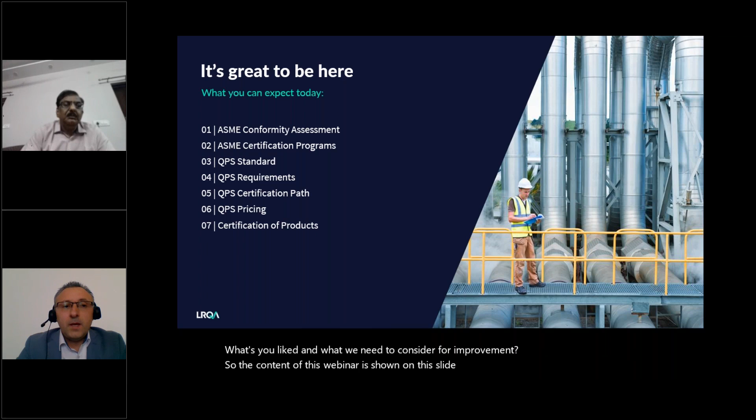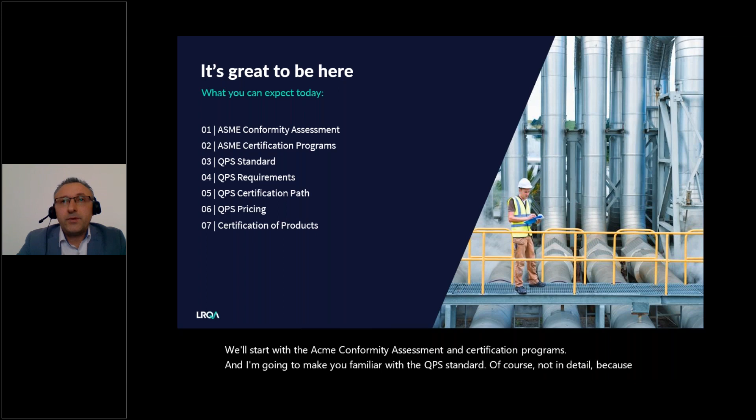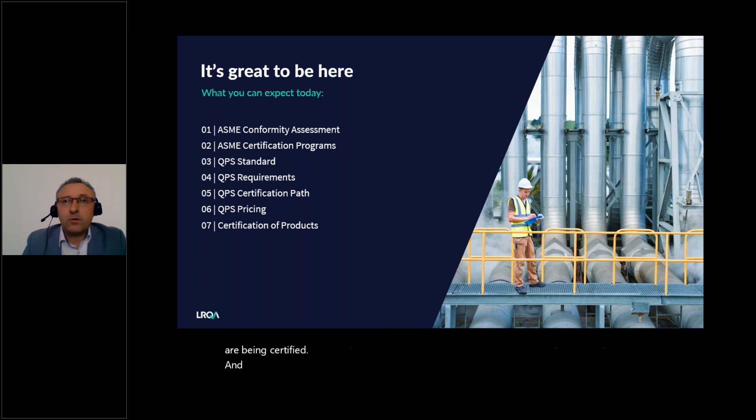The content of this webinar is shown on this slide. We'll start with the ASME conformity assessment and certification programs, and I'm going to make you familiar with the QPS standard, of course not in detail because this is just an introductory training session. I'm going to show you a couple of very specific QPS requirements and how the certification path looks like, information about the pricing, how the products are being certified, and of course, if you have some specific questions, we are going to take care of them.

ASME is located in the United States of America. The headquarters are in New York, but ASME has various offices throughout the United States in Little Falls, New Jersey, in Washington, D.C., Houston, Texas, and also Connecticut. Outside the United States of America, ASME has a liaison in Europe, Mr. Giancarlo Gobbi from Italy, and there are two more offices in Asia, in Beijing, China, and New Delhi, India. China and India are very important markets for ASME, and it's really a pleasure and privilege for me to make this webinar for India.

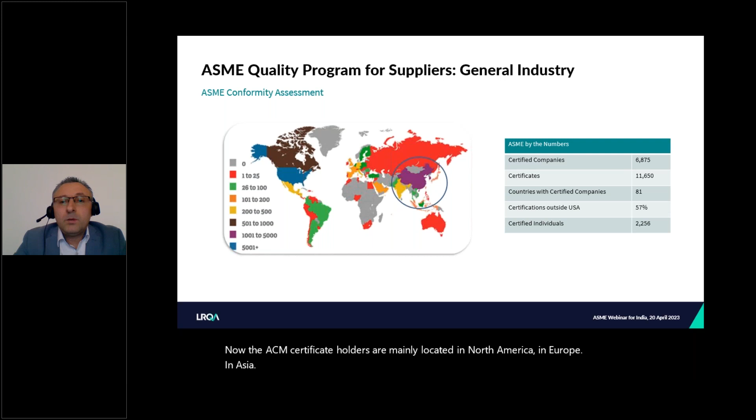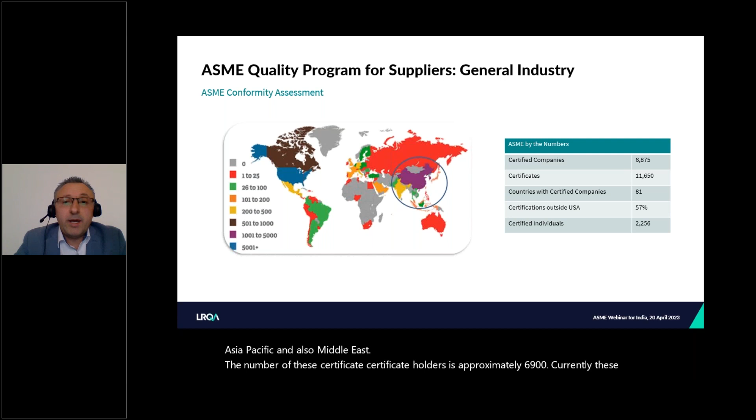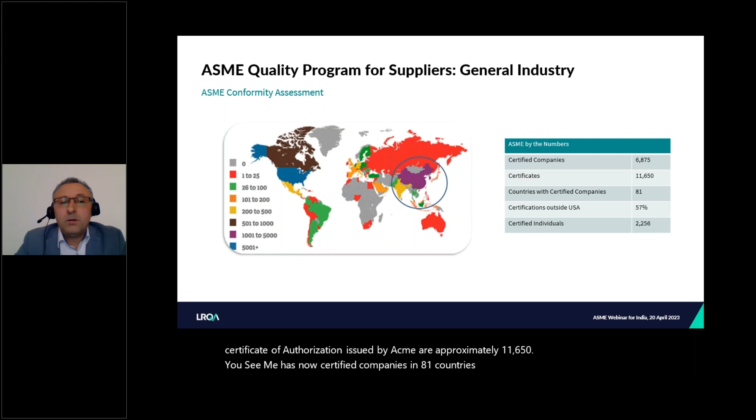Now, the ASME certificate holders are mainly located in North America, in Europe, in Asia, Asia Pacific, and also the Middle East. The number of certificate holders is approximately 6,900 currently. The certificates of authorization issued by ASME are approximately 11,650. ASME has now certified companies in 81 countries. 57% of the certificates issued are now outside the US, and more than 2,000 individuals are certified as certified individuals.

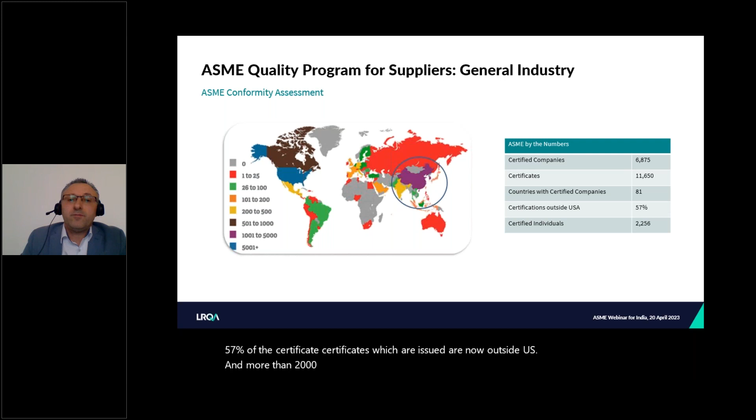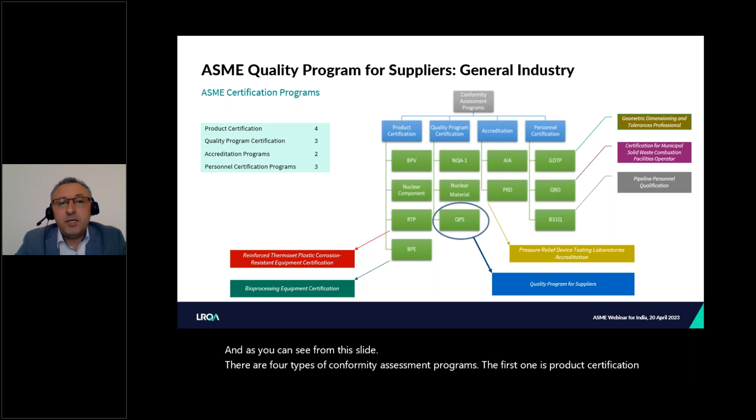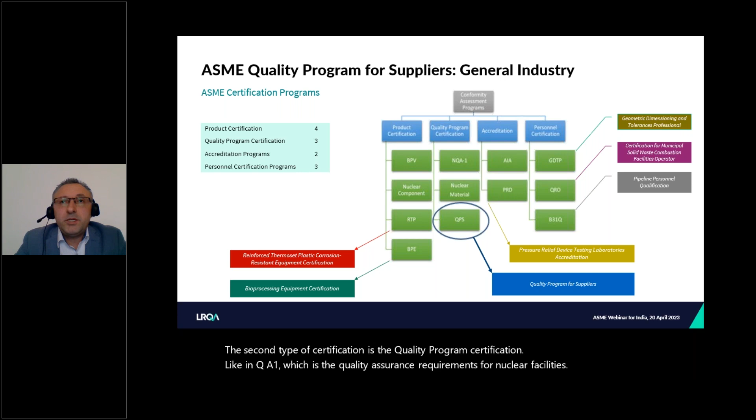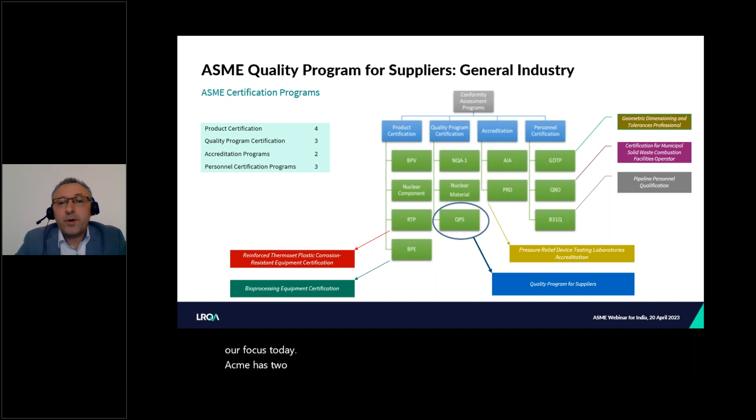ASME has developed and maintains various quality programs and conformity assessment programs. As you can see from this slide, there are 4 types of conformity assessment programs. The first is product certification, like boiler and pressure vessels (BPV), nuclear components, reinforced thermoset plastic corrosion resistant equipment, and bioprocessing equipment. The second type is quality program certification, like NQA-1, which is the quality assurance requirements for nuclear facilities, nuclear materials for companies producing and supplying materials, and QPS, the quality program for suppliers, which is our focus today. ASME also has 2 accreditation programs for authorized inspection agencies and for pressure relief device testing labs, and 3 personnel certification programs.

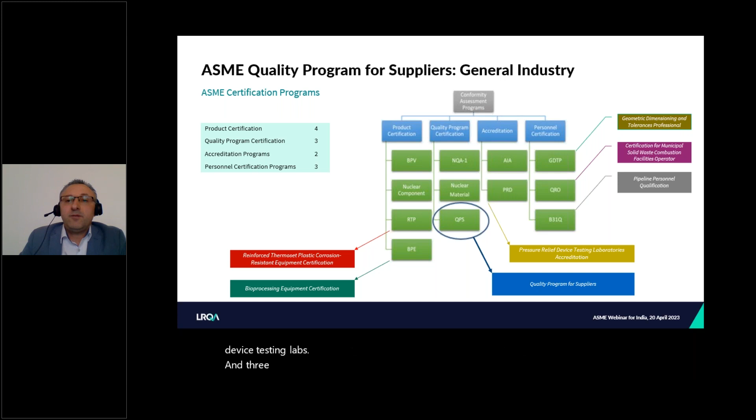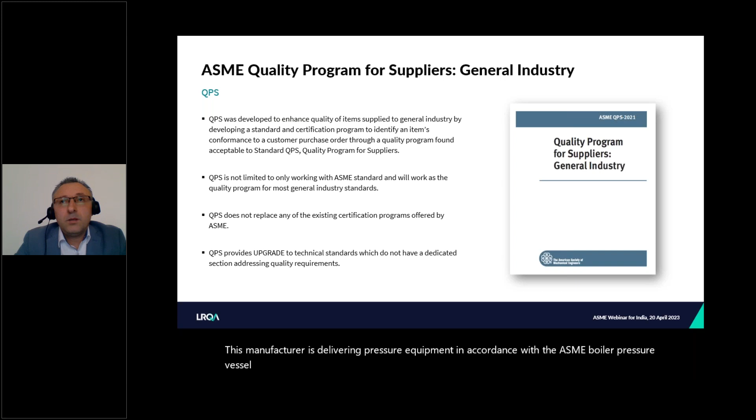What is QPS and why should QPS be applied? Let's take a manufacturer of pressure equipment in accordance with Section 1 or Section 8, Division 1. This manufacturer is delivering pressure equipment in accordance with the ASME boiler and pressure vessel code. So this manufacturer is a certificate holder, and this manufacturer is issued a certificate of authorization by ASME, which enables them to apply the ASME certification mark.

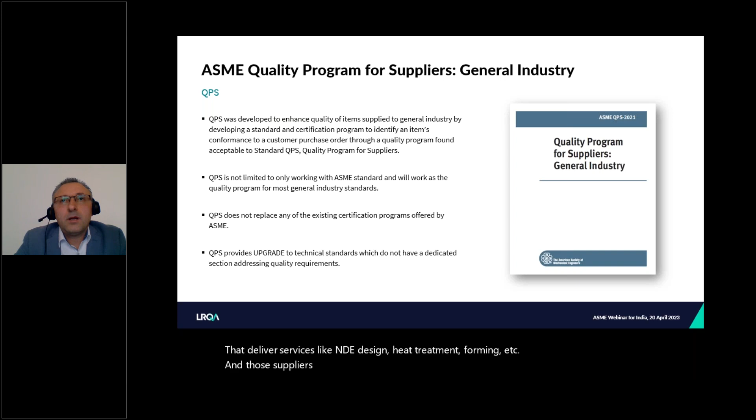But normally this manufacturer has various subcontractors, and some of those subcontractors are, for example, material manufacturers, non-nuclear, or companies that deliver services like NDE, design, heat treatment, forming, etc. Those suppliers are outside of the BPV and nuclear certification program of ASME, so there are no certification scopes for them. For that purpose, the QPS program was developed and will be implemented by ASME to allow all these companies, all these suppliers, to get a certificate of authorization from ASME.

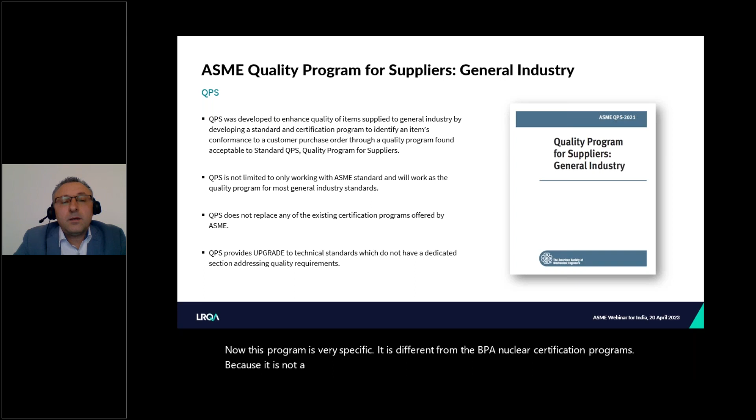Now, this program is very specific. It is different from the BPV and nuclear certification programs because it is not a product certification program, it is a program certification, which means that the organization does not certify the product itself, but they have and maintain a quality program, and they follow this quality program in order to deliver their product or services to their clients.

So the QPS is a program that can be applied and implemented by many types of organizations, and this is exactly the purpose, for those organizations who are outside of the certification scope of ASME to be able to get certified. This is an upgrade to technical standards which do not have a dedicated section addressing quality requirements, because such standards are just standards for manufacturing of products, but have no provision to provide quality programs.

So QPS can be used as an addition and in conjunction with such standards. This is important, it's not a replacement of an existing ASME program, it is a separate program. It is anticipated for companies which are delivering something, following their program, and verifying that by following their program, they will deliver products or services which are in compliance with their customers' requirements. And these customers' requirements can come from a standard, from a specification, or from another source document.

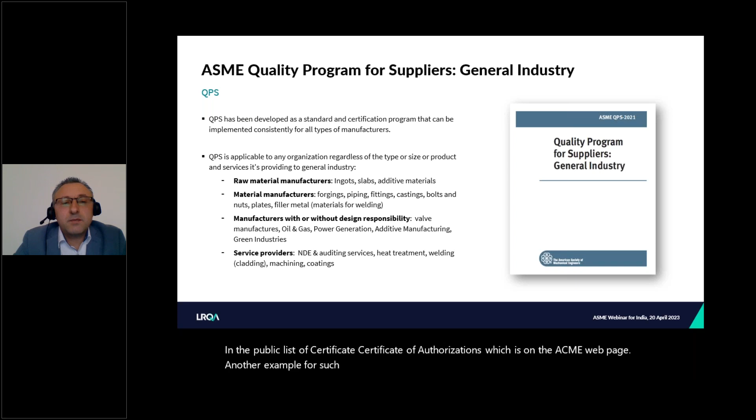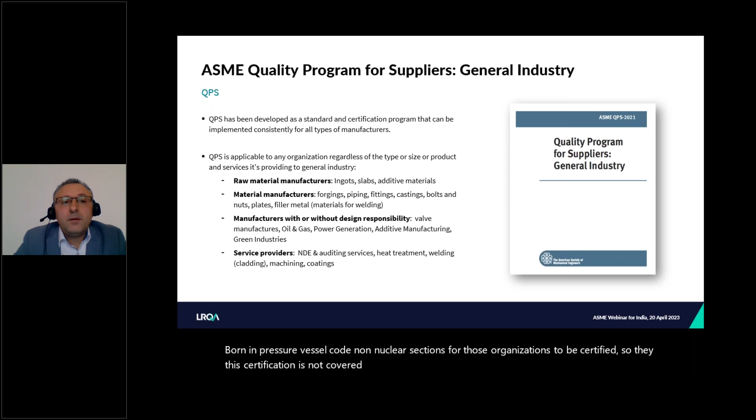Another example of such an organization is material manufacturers, non-nuclear, because there is no requirement in the Boiler and Pressure Vessel Code non-nuclear sections for those organizations to be certified. So this certification is not covered by the BPV, and so a material manufacturer can use the QPS standard to get a certificate of authorization from ASME.

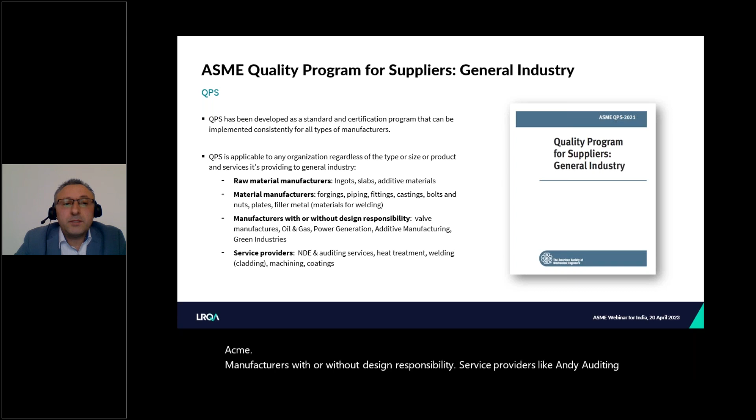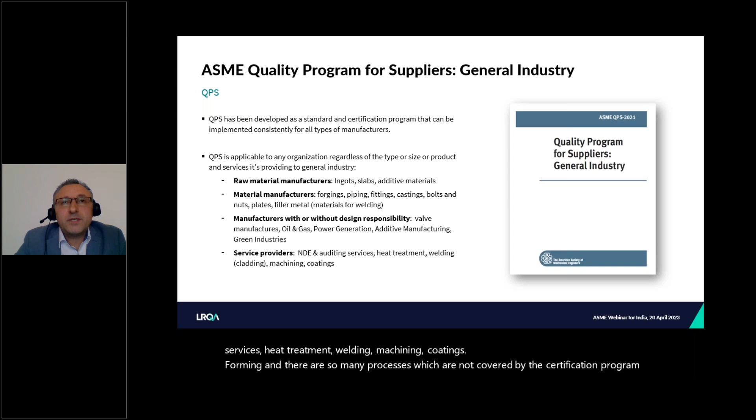Manufacturers with or without design responsibility, service providers like NDE, auditing services, heat treatment, welding, machining, coatings, forming - there are so many processes which are not covered by the certification program of the ASME Boiler and Pressure Vessel Code or nuclear code, but now they can get the certificate.

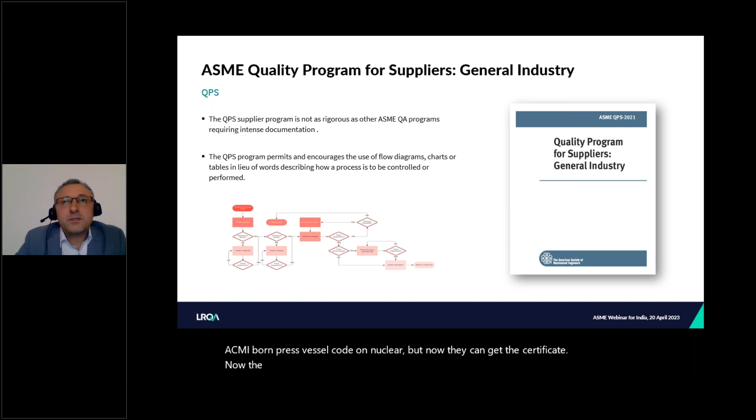Now, the quality program that needs to be established by the manufacturer is according to the QPS standard. There are requirements, of course, for the quality program, quality manual, but these requirements are a bit different from what you know and what you are familiar with in the Boiler and Pressure Vessel Code, for example.

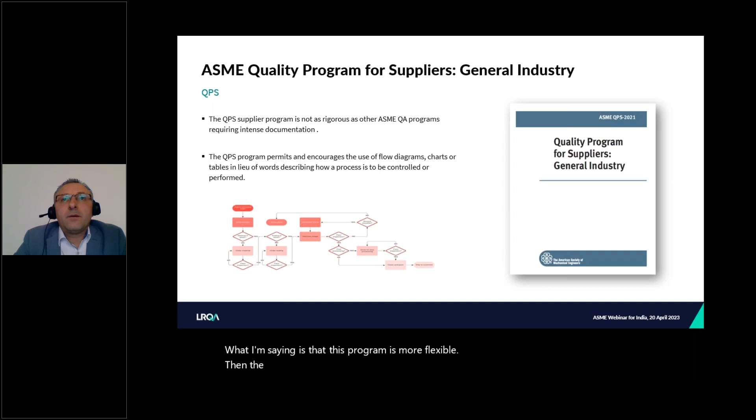Certain requirements can be, let's say, replaced by diagrams, charts, tables, spreadsheets, whatsoever, and not necessarily expressed by wording, so that the program is much more understandable and can be easily implemented by the organization and easily understood by the customer. So what I'm saying is that this program is more flexible than the requirements from the BPV for a quality program.

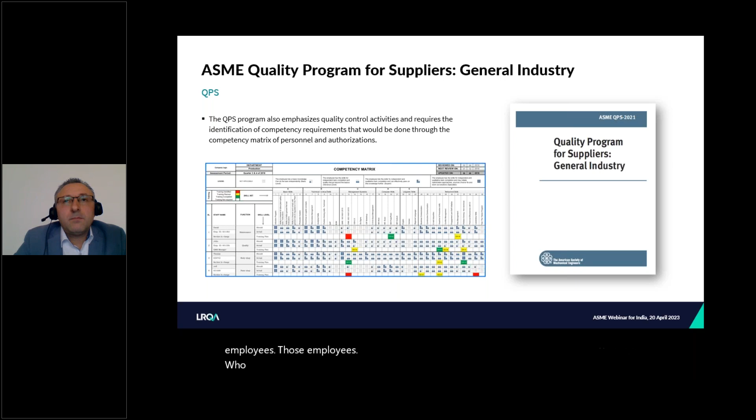A very important requirement in the QPS standard is the competency matrix. This matrix shows how the manufacturer is prescribing the competency requirements for the key employees, those employees who need to be qualified, who need to be competent, who need to be somehow credentialed.

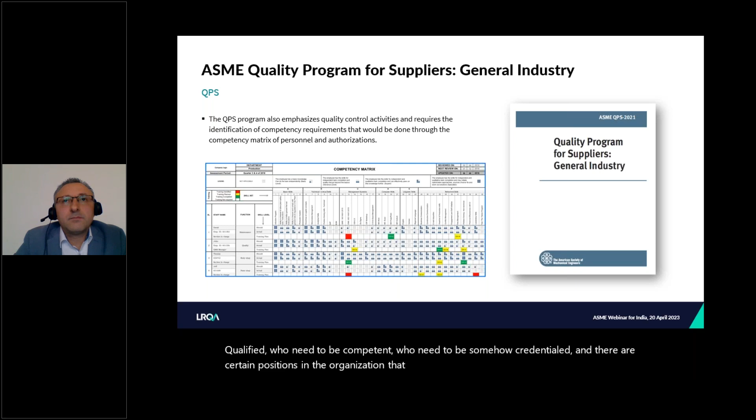And there are certain positions in the organization that need credentials, like quality manager, technical manager, NDE staff, welders, those who are performing internal or external audits. All these people must be competent, and this competency must be specified by the organization, normally in a document called the competency matrix.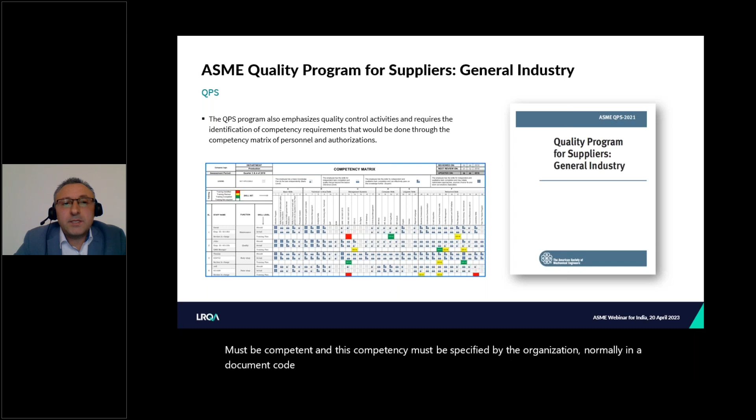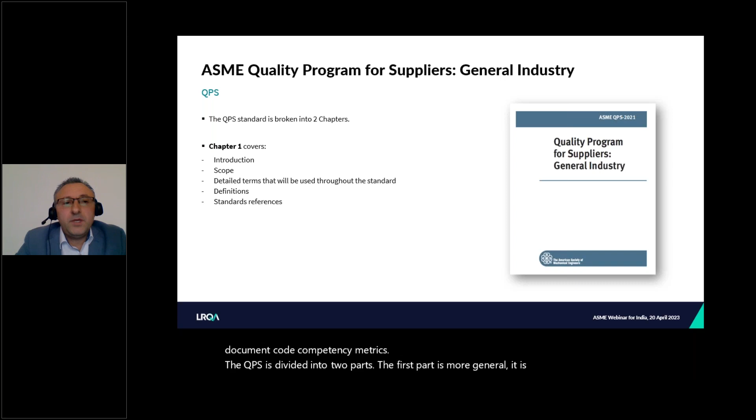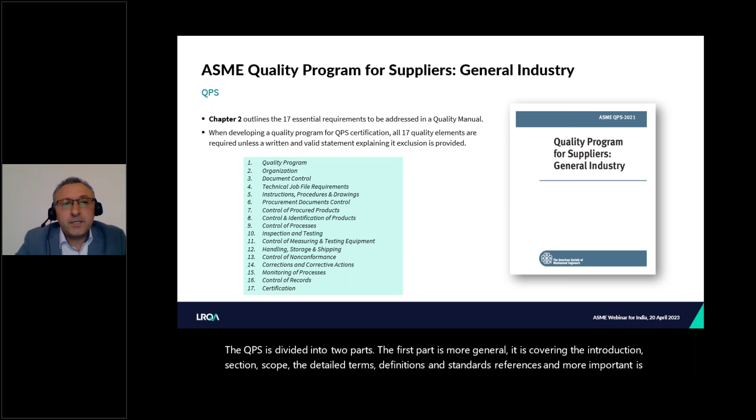The QPS is divided into two parts. The first part is more general, covering the introduction section, the scope, the detailed terms, definitions, and standards references. More important is the second chapter, which outlines the 17 essential elements or requirements to be addressed in the quality manual.

Now, if one of the elements is not necessarily applicable for an organization, it can be excluded, but there must be an explanation why it is excluded. And you can see these 17 elements on this slide.

Quality program is a typical section in every quality manual, saying some responsibilities and organization, like the second chapter. Document control is also a typical section in each program. Technical job file requirements - this is very important and specific for QPS because...

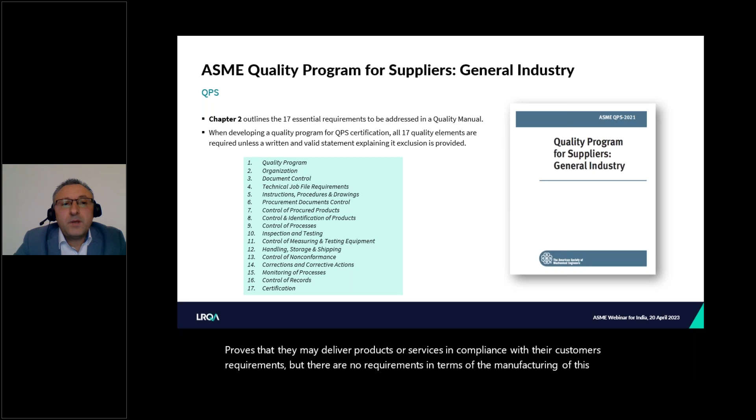QPS is a quality program, and by following this quality program, the organization proves that they may deliver products or services in compliance with their customers' requirements, but there are no requirements in terms of the manufacturing of these products. That's why the QPS is always used in conjunction with a construction code or governing standard.

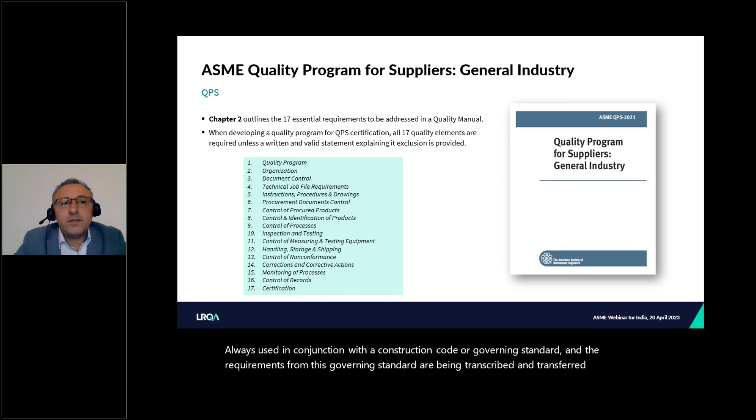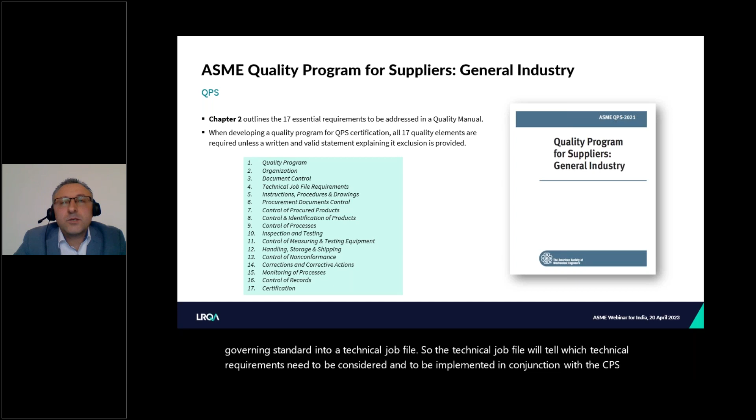And the requirements from this governing standard are transcribed and transferred from the governing standard into a technical job file. So the technical job file will tell which technical requirements need to be considered and implemented in conjunction with the QPS requirements, so that in the end, the organization can declare, can certify that the requirements of the QPS are fulfilled, and also the requirements in the technical job file.

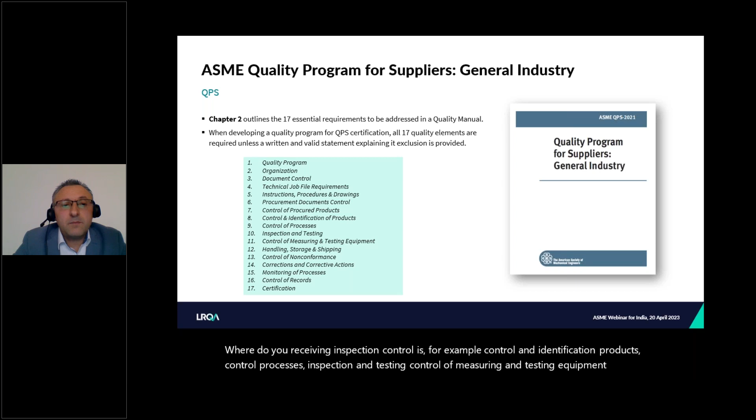Another element is instructions, procedures, and drawings. We also have procurement document control, where the selection of suppliers is covered, and also the preparation of purchase orders. Another element is control of procured products, where receiving inspection control covers, for example, control and identification of products, control of processes, inspection and testing, control of measuring and testing equipment, handling, storage, and shipping, control of non-conformities, corrections and corrective actions, monitoring of processes, control of records, and certification.

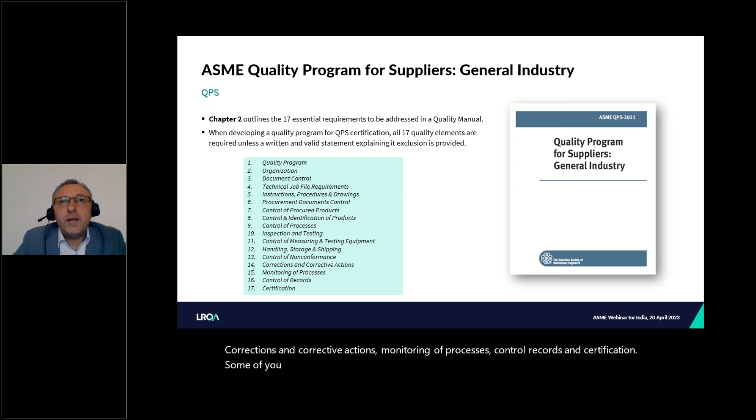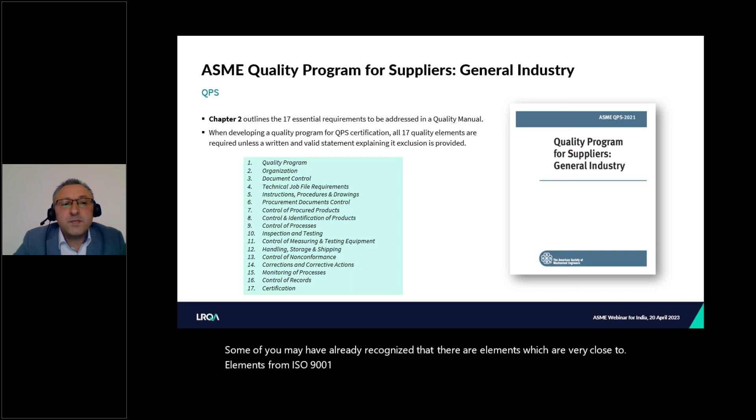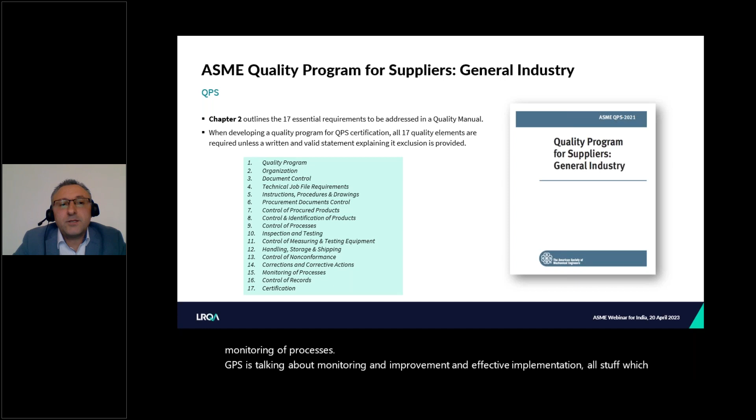Some of you may have already recognized that there are elements which are very close to elements from ISO 9001, like control of processes, corrections and corrective actions, and monitoring of processes. QPS talks about monitoring, improvement, and effective implementation, all covered by ISO 9001. So there are many similarities, but also differences to ISO 9001. I'm going to explain two major differences from ISO 9001.

ISO is really very, very broad in scope. It is a generic set of requirements. It can be implemented literally for every type of organization, not necessarily technical, but also, let's say, a taxi company or laundry or every single company.

While QPS is also broad, it's not as broad as ISO, because QPS is a standard anticipated for suppliers, for general industry. So this is basically the scope of the standard - it's not as broad as ISO 9001.

The second major difference is that ISO does not provide a centralized certification. ISO 9001 certification is offered by third-party organizations, meaning it's up to the organization to select which company is going to audit them and issue their ISO 9001 certificate. This is not the case with ASME QPS, because only ASME may issue a certificate of authorization. This is good because it provides consistency, and in the end of the day, the requirements are clear and transparent.

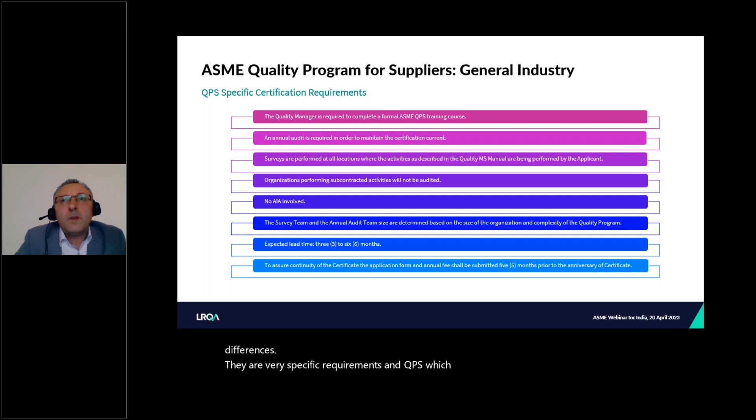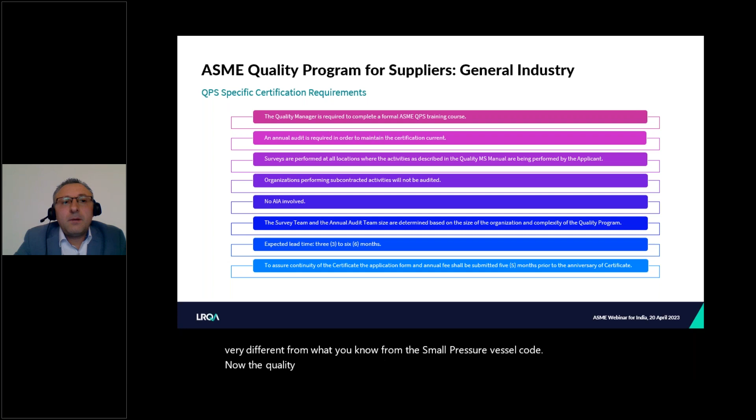There are very specific requirements in QPS which you should know, because these are really very different from what you know from the ASME Boiler and Pressure Vessel Code. Now, the quality manager is required to complete a formal ASME QPS training course. This is a specific requirement - the quality manager must undergo a course being administered and provided by ASME.

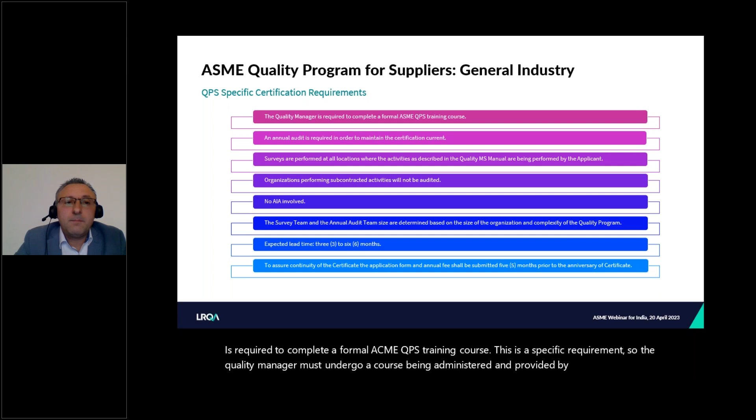Another requirement is that after the initial certification, the certificate is valid continuously, but every year there must be an additional audit by ASME for the company to maintain their certification current. If this audit is successful, the certification is prolonged automatically for another year. Then next year, ASME provides the audit again, and if everything runs smoothly, the certificate is renewed automatically for another year, and so on.

The surveys are performed at each location identified in the application and also in the manual. Subcontractors are not included in the audit - ASME does not audit the subcontracted activities at the subcontractor's location, but they will, of course, audit the controls put in place by the organization to ensure that the subcontracted activities are in compliance.

The agencies are not involved, so no AIA is officially involved in the certification process. The survey team and the annual audit team size is determined based on the size of the organization and complexity of the quality program. The lead time normally takes from 3 to 6 months, and if it's a renewal, the application must be sent at least 5 months prior to the expiration date.

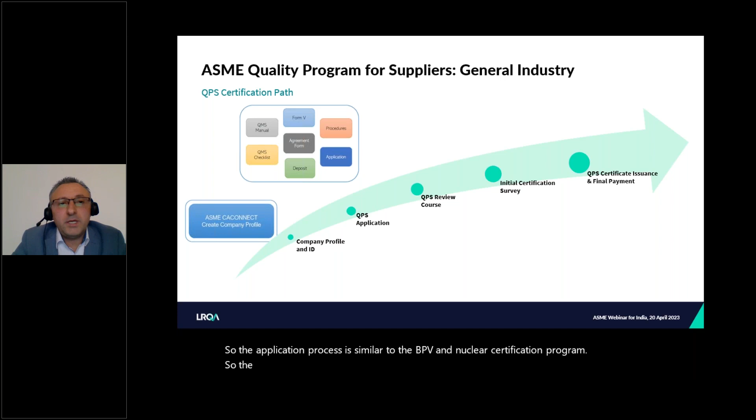The certification path normally consists of 5 stages. The first one is the company profile - the company needs to register in CA Connect and make a company profile. The second step is to prepare an application. The application process is similar to the BPV and nuclear certification program, so the application form needs to be completed. There is an agreement form that needs to be signed off by the applicant. The applicant must upload their QMS manual and procedures and all documents related to the quality program.

They need to complete and provide the checklist, which is similar to the ASME guide for the BPV and nuclear certification programs. There is a Form 5, an additional form that needs to be completed by the company because it contains additional information useful to the review team, to get impression and flavor about the company, the size, the scope, what they are anticipating to perform, contact details, location details. So all this information is captured in Form 5.

Of course, the fees need to be paid, and I'm going to show you more information about the pricing. With this, the application is sent to ASME. The next step is for ASME to schedule the dates, and then for the company to prepare themselves for the survey.

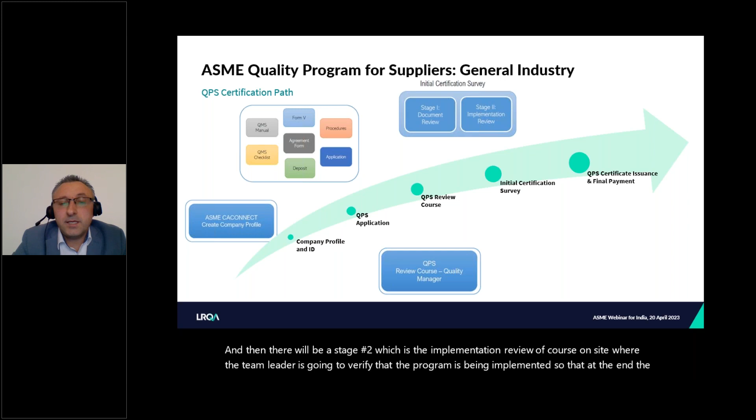So it is something that ASME is going to determine. There are two options: either Stage 1 is performed in advance, separately - in this case the ASME team leader writes a report and sends it to ASME for consideration review - and then there will be Stage 2, the implementation review, on site, where the team leader verifies that the program is being implemented, so that at the end the product or service is in compliance with the QPS standard and the technical job file.

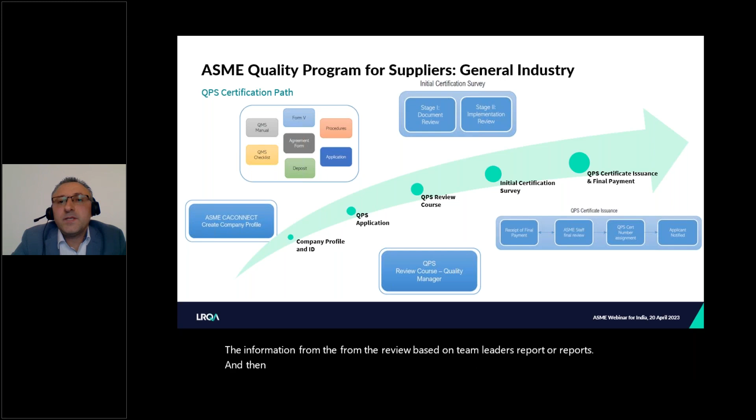If the review is successful, the team leader recommends issuing the certificate to the certification committee. The certification committee considers the information from the review based on the team leader's report or reports, and if they are convinced the review was successful, they assign a certificate number and issue a certificate of authorization to this applicant. With this, the process is over.

Now some more information about the review. As I mentioned, there are two stages, Stage 1 and Stage 2. During Stage 1, the ASME auditor reviews the manual, the procedures, instructions, forms, and whatever forms are included in the quality program, in order to assess compliance with the QPS standard. So here the focus is the QPS standard - the requirements of the standard must be transferred into the quality manual and all related documents.

A written report of the survey is issued by the team leader and sent to ASME with recommendation. Any findings, of course, need to be addressed. Stage 2, the implementation review, is the second part, the implementation part. Again, there is a written report stating the outcome of the review, whether there are open deficiencies or not. ASME processes this information before deciding if they will issue the certificate.

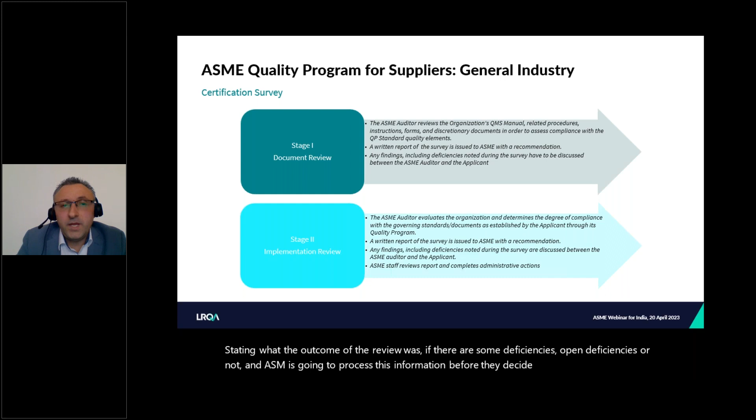The pricing model is very well determined by ASME, and there are two cases. Case number 1 is initial certification - this is an applicant seeking QPS certification for the first time. Case number 2 is maintenance, which applies every year after the initial certification. In both cases, the price is fixed.

The price is dependent on the class structure. There are 6 classes determined by ASME based on the number of employees, the number of locations, and the complexity of the quality program. On the right hand side, you see the classes and the number of employees. So if an organization has, let's say, 75 employees, one location, and the program is not very simple but also not very complex...

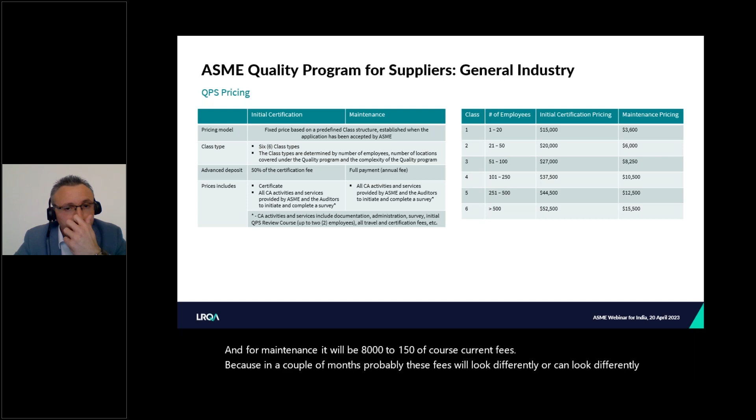...then the price will be $27,000 US, and for maintenance it will be $8,250 - of course, current fees, because in a couple of months these fees will probably look different. So this is current information from where we stand.

The price for initial certification is paid in 2 stages. The first is 50% of the certification fee, the total fee, paid in advance, and the second 50% is paid before the certificate is issued. So the review was successful, then the rest of the fee is paid, and once the money is there, ASME is going to issue the certificate of authorization.

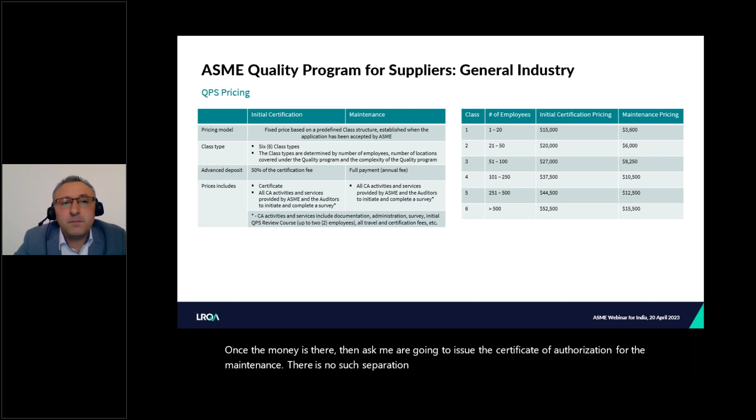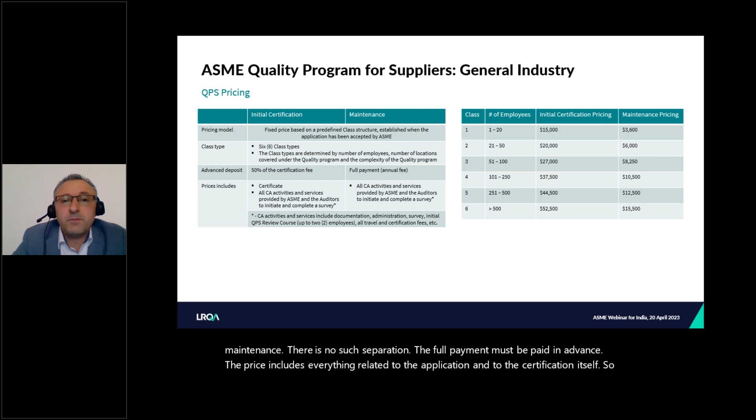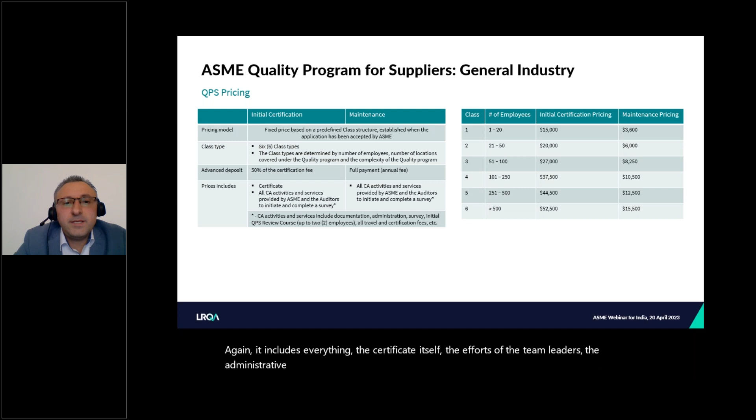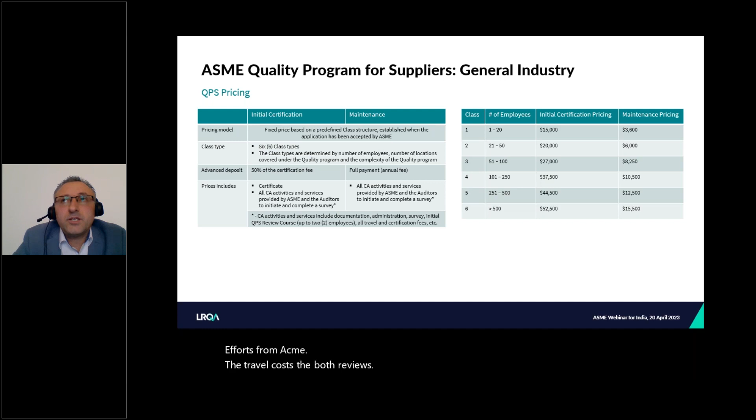For the maintenance, there is no such separation - the full payment must be paid in advance. The price includes everything related to the application and to the certification itself. So it is an all-inclusive price, a flat rate, fixed. Again, it includes everything: the certificate itself, the efforts of the team leaders, the administrative efforts from ASME, the travel costs, both reviews, and any documentation that needs to be created and processed by ASME. So everything is included in this price.

About the certification of the products: QPS is a program certification. It is not a product certification, which means that when a product is being produced, this product is not stamped with an ASME certification mark. What's important here is that the company is able to produce following their program, and not to certify each single product. This is exactly the opposite case with the BPV nuclear program, where each single product is being certified.

So ASME needs to verify that the program is appropriate and correctly implemented, so that each product or service delivered by the organization is in compliance with the QPS program and the technical job file. Again, there is no stamp.

This is specific. And the other specific thing is that the organization must issue a certificate of conformance. This is basically how the organization certifies the product. So there is no stamp on the product, but there is a document, a certificate of conformance, where it is identified that the company is following a quality program.

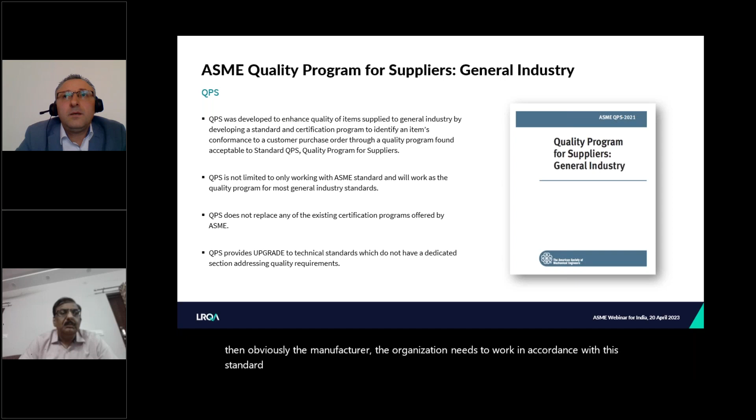Another thing which reminds me now is that because QPS is a quality program like ISO 9001, this is really an upgrade to be used in conjunction, because if there is a construction code, then obviously the manufacturer needs to work in accordance with this standard. Having QPS is like an upgrade for them, because through the declaration of conformity they can say the product is in compliance with the governing standard, and also being provided in accordance with a quality program which may or may not be covered by the governing standard. So this is something on top of what the company is doing, and provides a good opportunity for companies which otherwise may not get certificate of authorization from ASME because it's not in the scope of certification. It really provides a good opportunity for each company through the supply chain to get such certificate.

Next question, Dr. Parvan, is related to what type of training is required for the quality manager and is it mandatory?

The training is a QPS training, provided by ASME, and is mandatory for the quality manager. ASME does a complimentary training for companies who apply for certification, and this training is included in the final price. Also, organizations may send two individuals to be trained by ASME. They will get a certificate, and at least one of them must be the quality manager, because the quality manager must be credentialed. It's a code requirement, the QPS requirement. So the quality manager must be trained by ASME for sure.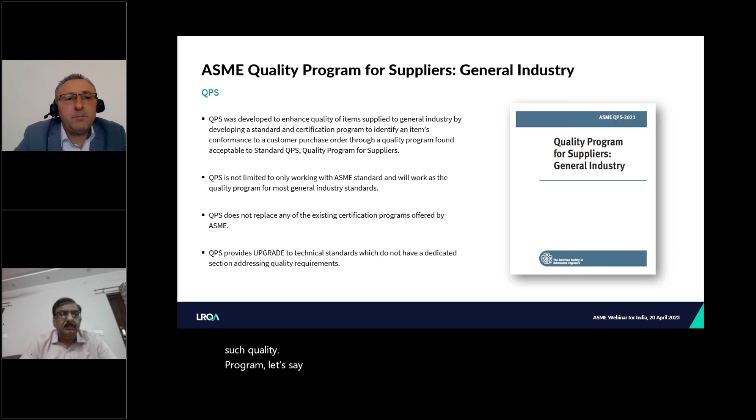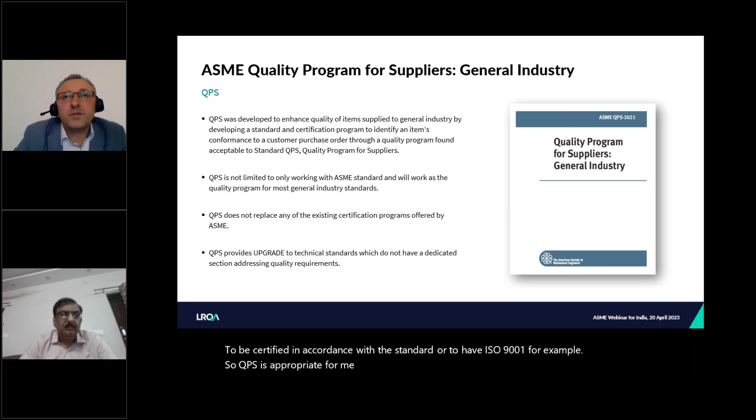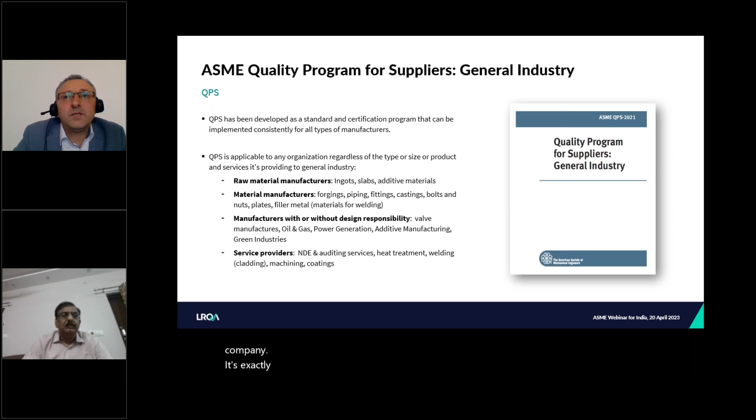The next question, which I think you've already answered once, is whether QPS is mandatory for all ASME certificate holders. As already said, it is not a mandatory program as of now. But I understand the background of this question, probably I didn't express myself correctly. If a company is already a certificate holder, there is no need for them to go through this program, because they already have a quality program which is audited by ASME. This QPS program is anticipated for companies who normally deliver products or services according to standards which do not prescribe such a quality program. Let's say if I'm an NDE company, there is no requirement for me to be certified in accordance with the standard, or to have ISO 9001, for example. So QPS is appropriate for me to give confidence to my customers that I'm working in accordance with a quality program. They have their written practice, but this is something else. Or if I'm a heat treatment company or a forming company, it's exactly the same — probably I don't have a quality program because I don't need it from a standards perspective. Now with QPS, I will have such a quality program, and this quality program will be approved by ASME, which is exactly the point. So now I have an ASME approved program, so that I will be recognized through the supply chain and by my customer that I'm really a competent partner for them.

The next question is whether ISO 9001 is mandatory for getting this ASME certification. No, it's not mandatory.

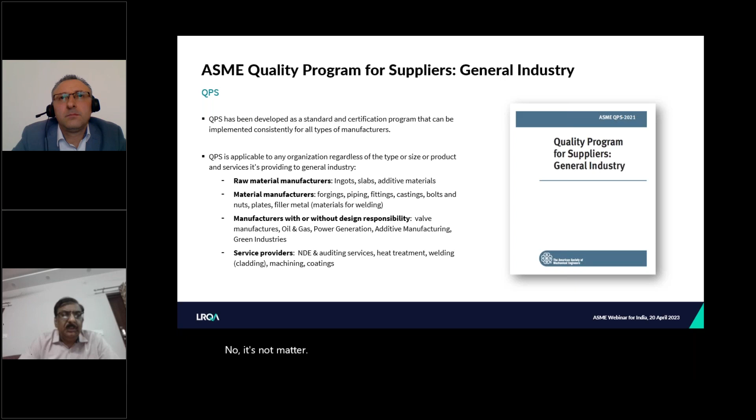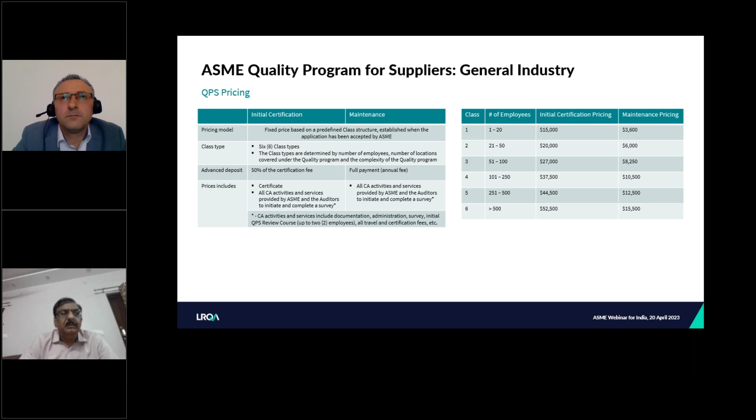There is a question related to the fee we shared in one of the slides: whether the ASME fee displayed in the presentation is specific to India or is it the same globally? I didn't catch the last part of your question. Whether the fee that we shared in the presentation is related to India or is it a global fee? It's global. It's not related to a country. It is the global ASME rule for how to handle this.

So the price is fixed based on three parameters: the number of employees, the number of locations, and the complexity of the program. Based on this information, ASME is going to define the class, and for each class the fee is fixed. So 50% is paid in advance, and the other 50% is paid at the end of the process.

So does ASME have any plan to mandate this in the future for COA holders? I'm not aware of such plans, to be honest. Of course ASME will be more than happy to have more certificate holders, but I don't believe that ASME will mandate or can mandate the implementation of this program. Of course, ASME encourages companies to get this certification, but it's not mandatory.

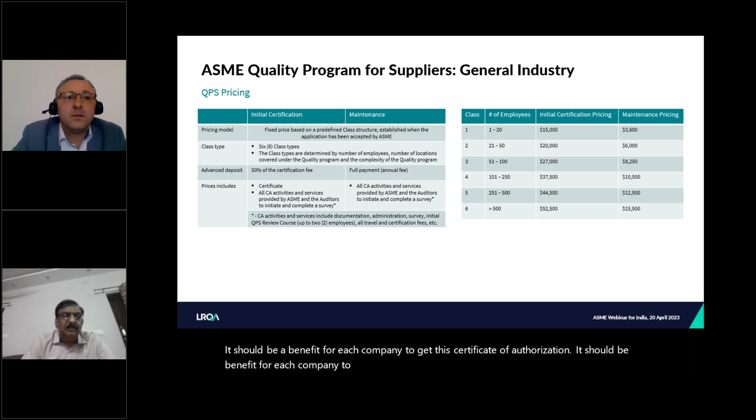It should be a benefit for each company to get this certificate of authorization and to be recognized globally, because they will be listed in the official certificate holders list on the ASME webpage. So that's a great advantage for them.

A question related to the scope: whether a QPS holder manufacturing carbon steel flanges can be eligible to manufacture titanium flanges without recertification. So if they qualified for carbon steel flanges, can they increase the scope, or do they need recertification?

Again, this is not a product certification, it is a program certification. So they need to define in their quality program how they are going to handle such products. If that is the case, I don't see any reason why they shouldn't be able to provide also titanium flanges or other product forms. Again, they do not certify the product itself.

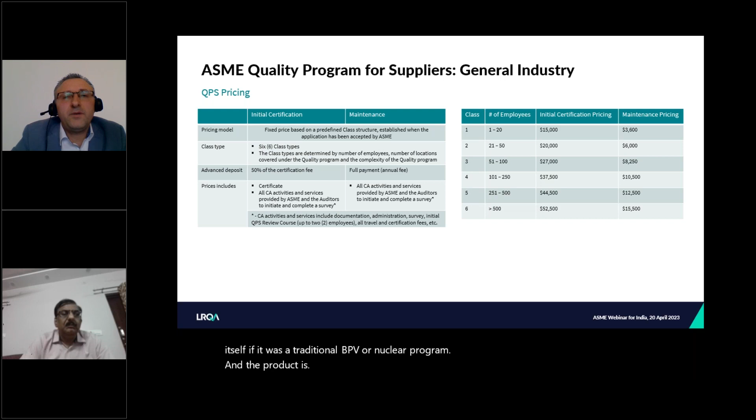If it was a traditional BPV or nuclear program, and the product is very, very different from what they have been certified for, there may be a need for a new certification, or at least to update their certification. But in this case, if they follow their quality program, and the technical requirements for the titanium flange are covered in a technical standard or specification, then it should not be any problem.

This technical job file is very important because it is exactly the bridge between the governing standard and the QPS. The QPS must have, for each project and each product, this technical job file. This is the guarantee that requirements are transferred from the governing standard and go through the QPS program, so that in the end the product will be in line with the QPS program, because the QPS program has provisions to address the requirements from the governing standard. So it is a program certification. It should not be any problem to deliver these new products.

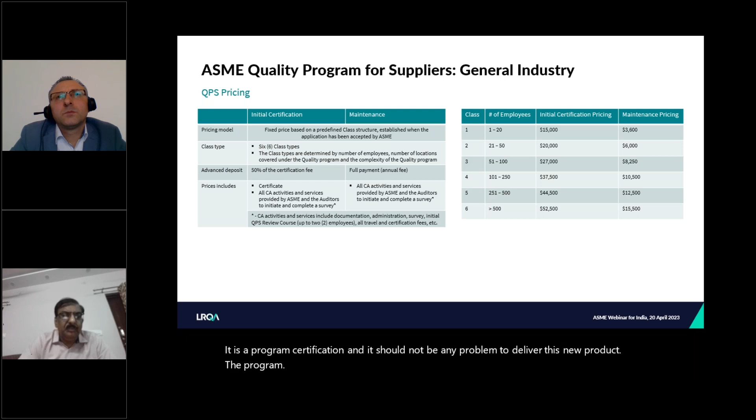The validity of the program - there is a question related to that, and what is the validity of the certification of the supplier and also of the quality manager. So the certificate is valid for one year, because there is an annual audit.

If they undergo this annual audit and it is successful, they just need to pay the maintenance fee, and they will get an extension for another year. So basically, there is no expiration date - there is prolongation for each next year.

For the quality manager, he needs to go to the ASME training. Once he has the training, I don't think that this training expires - he is good to go. At least I'm not aware of any requirement that implies he needs a refreshment, or that his certificate issued by ASME expires.

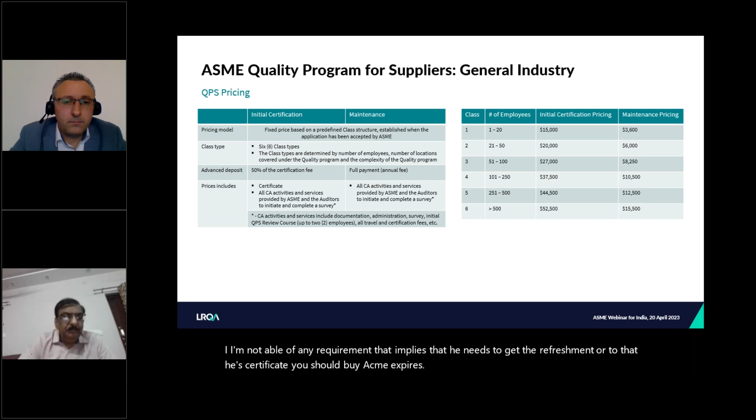I think we have time for one question: since the product cannot be marked with any ASME marking, how will the manufacturer convey that the product was manufactured in compliance with the QPS certification?

The company doesn't stamp the product, but the company certifies the product by issuing a certificate of conformance. As shown on this slide, the certificate of conformance will contain and indicate the QPS certificate number and expiration date, and also the edition, revision, and date of the quality manual. So this information - the certificate number with expiration date and a reference to the quality manual - is the company's way to declare and certify the product, meaning the product is manufactured in accordance with an approved quality program which is still valid.

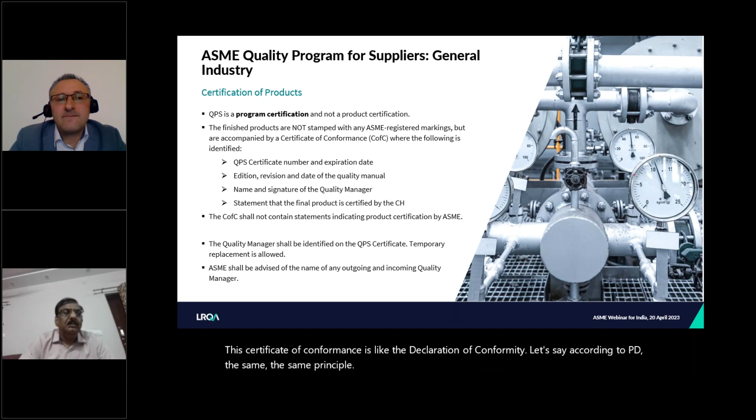And they have a quality certificate issued by ASME, which is also valid, and this is again their certification. This certificate of conformance is like the declaration of conformity, let's say according to PED - the same principle. There is no stamp because it's not a product certification, it is a program. By fulfilling the program, by following the program, they guarantee that the product is in line with the requirements. This is the quintessence.